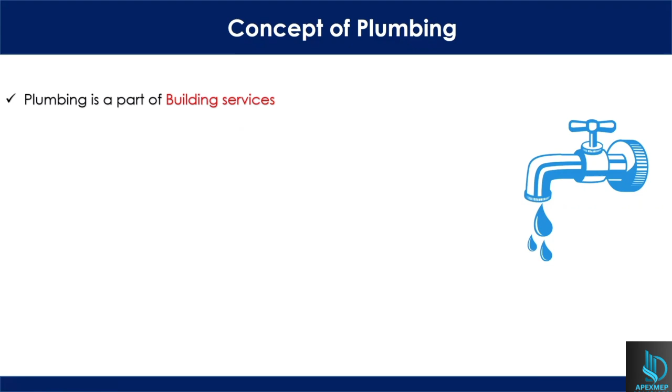If you go by the definition of plumbing systems, it is that service that provides safe, potable water at adequate pressure and quantities. Pressure and quantities are the two most important things while you are supplying the water inside the building at desired locations. So we have bathrooms, we have shower areas. Wherever we have the demand of water, there we have to supply the water at desirable pressure and quantities.

For example, this is a hose bib, right? In this case, there'll be some pressure of water while it is leaving this hose bib. So what is the minimum pressure that you have to maintain while supplying the water to this fixture? And the quantity means how many gallons per minute you have to maintain as the flow rate across this hose bib. So these two things you have to keep in mind. This is very important, and we have to follow as per the standard. There's no calculation involved. We have to directly follow the standards.

And carrying away the waste matter in a hygienic manner. Once you are supplying the water, there'll be some wastage also. That wastage we have to carry outside the building in a hygienic manner. Hygienic manner means you have to carry it out in a way that it should not smell inside the building. It should not splash outside the pipe. All those things you have to keep in mind.

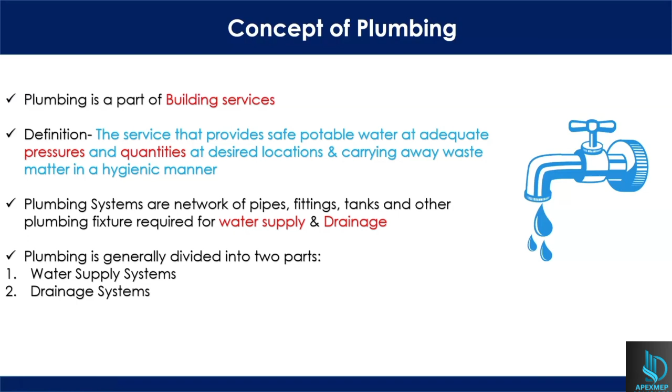Plumbing systems are a network of pipes, fittings, tanks which are used for storing the water, and other plumbing fixtures like water closets, lavatories, urinals. So it's a network of all those things which are required for water supply and drainage. Water supply and drainage are the two important things in the whole plumbing design. It is basically divided into two parts: one is the water supply system and one is your drainage system. In this course, we'll majorly focus on the water supply systems.

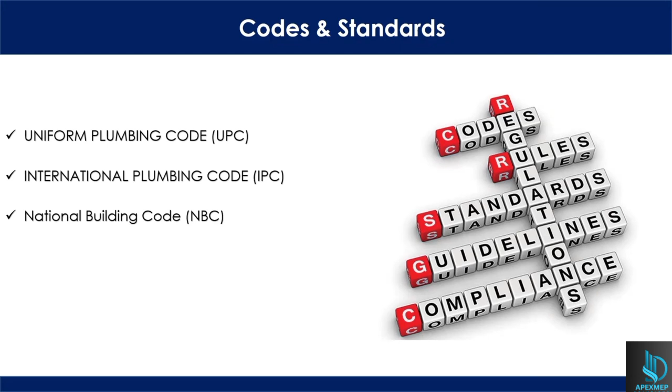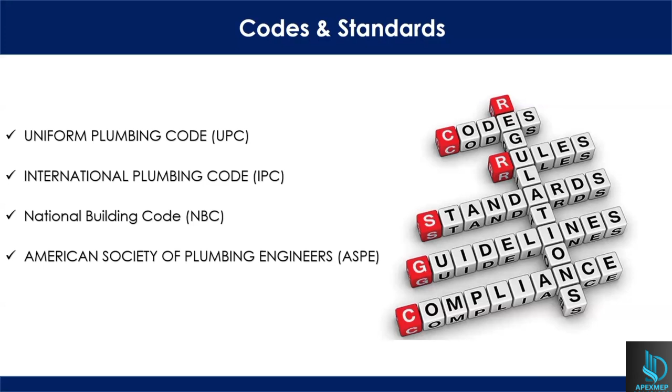Codes and standards. During our plumbing design, we will be using some codes and standards for our design purpose. What are those? The most commonly used codes and standards are: the first one is your Uniform Plumbing Code, UPC, International Plumbing Code, IPC, National Building Code, that is NBC, and American Society of Plumbing Engineers, that is called ASPE. There are many more standards available, but the most commonly used that we'll be using in this course are these four.

Now we will understand the concept of plumbing systems for residential homes and commercial buildings. In our residential homes, we have one domestic overhead tank placed on the roof that supplies water to all the fixtures inside our homes. This domestic water tank is filled either by the submersible pump or from the municipality line. The water discharged from all these fixtures, which is known as black water, is sent outside the building, either to the septic tank or the municipality sewer line. So this is the case we have in our residential homes.

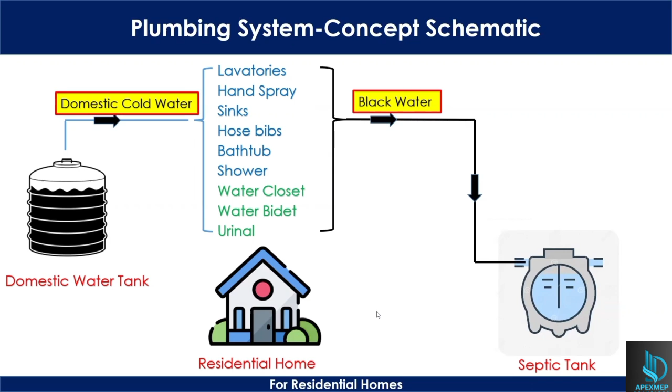Whereas for a commercial building, the scene is different. We have a domestic overhead tank placed on the roof, and that supplies water only to the non-toilet fixtures. These are the toilet fixtures: water closet, bidet, urinal. Other than that are lavatories, hand spray sinks. These are non-toilet fixtures, where the water comes in contact with the human. So the domestic water tank will supply water only to these fixtures, which is called domestic cold water. The discharge from these fixtures will be supplied to the gray water tank.

This is known as the gray water tank, and the water which is discharged from these fixtures is known as the wastewater. What is the purpose of this gray water tank? It will recycle that water, and that water after recycling will be used in these fixtures, because the water in these fixtures will be used for flushing. So that is why this water which we are getting from this gray water tank is known as

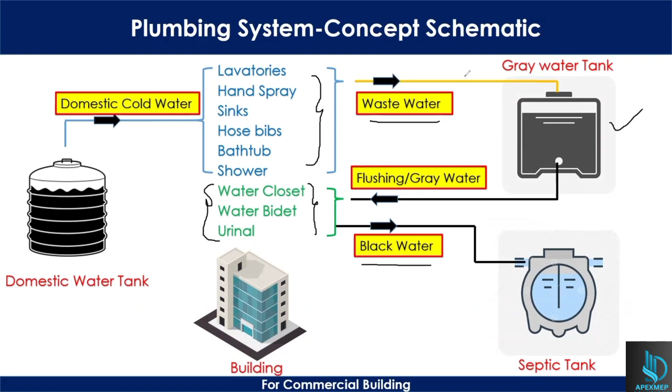flushing or gray water. The water after discharging from these fixtures will be sent back to the septic tank or the municipality sewer line. This water which is discharged from these toilet fixtures is known as the black water. So this is the concept that we have in a commercial building.

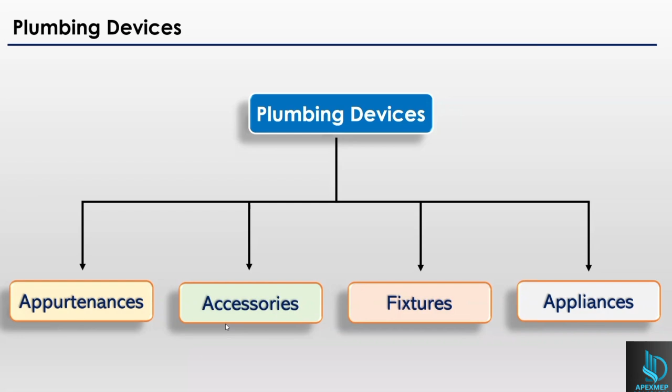Plumbing devices. We have classified the plumbing devices into four main types: appurtenances, accessories, fixtures, and appliances. We'll be looking at the functions of these plumbing devices. Appurtenances are used to make the system more effective, for example, valves. Accessories are used to perform some useful functions like operating, maintaining, inspecting, or servicing, for example, a water meter.

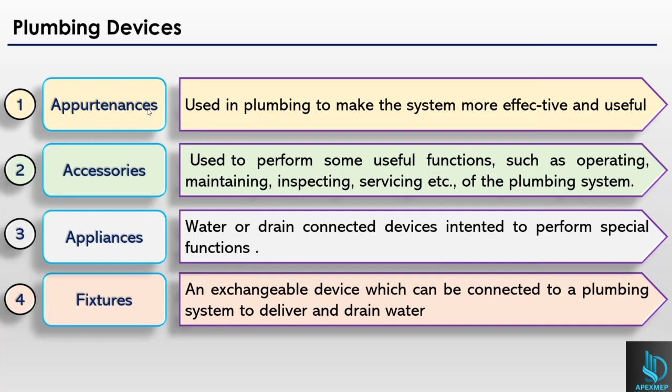Appliances are water or drain connected devices intended to perform some special functions, for example, a washing machine or a drinking fountain. So all that will come under the appliances. Fixtures are exchangeable devices, for example, water closet, lavatories, wash basin. So all that will come under your fixtures. So we have a list of all the items, the things that will be covered in each plumbing device.

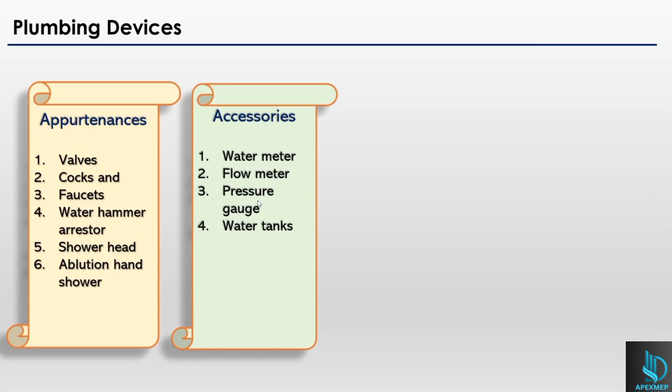In appurtenances, we have valves, cocks and faucets, water hammer arrestor, shower head, and ablution hand shower. In accessories, we have water meter, flow meter, pressure gauge, water tanks. In fixtures, we have lavatories, bathtub, kitchen sink, water closet, urinals, and bidet. In appliances, we have flushing devices, drinking fountains, washing machines, and interceptor. An interceptor can be, for example, a grease interceptor. So all these are the items that we have in these plumbing devices.

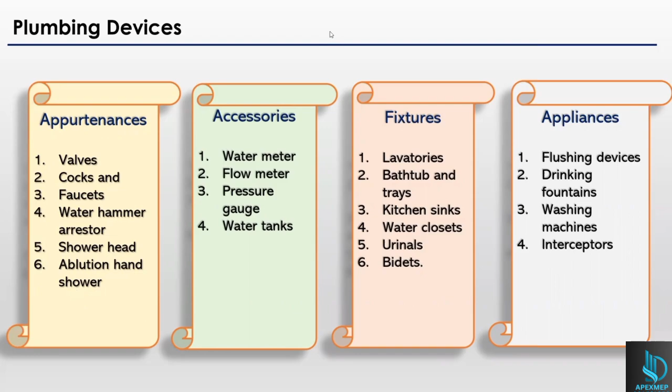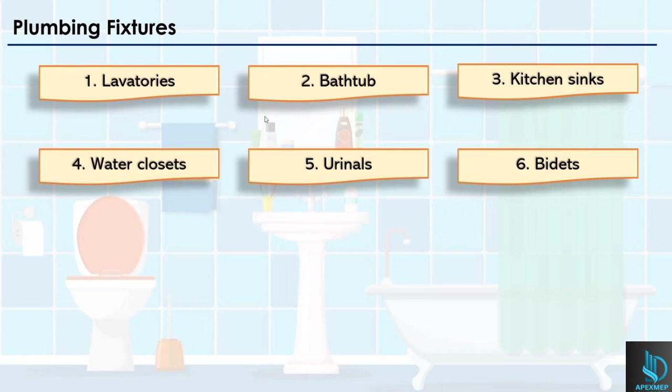Plumbing fixtures. Generally, we have these 6 common types of plumbing fixtures: lavatories, bathtub, kitchen sink, water closet, urinals, and bidet. One by one, we will be looking at each of these plumbing fixtures and their installation details. Lavatories basically have 4 main types: wall hung, pedestal, countertop basin, or corner basin.

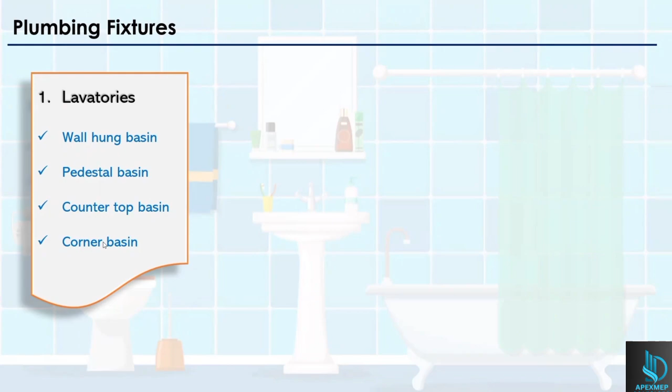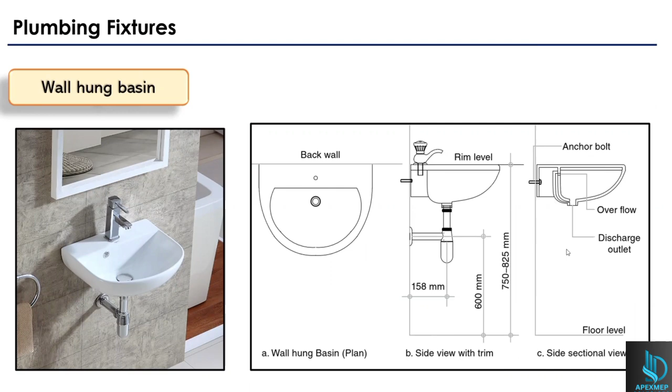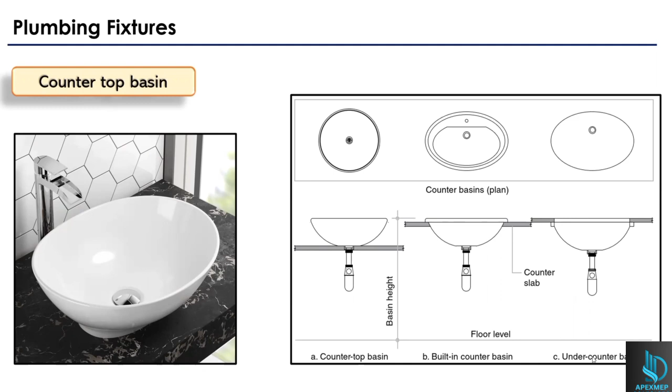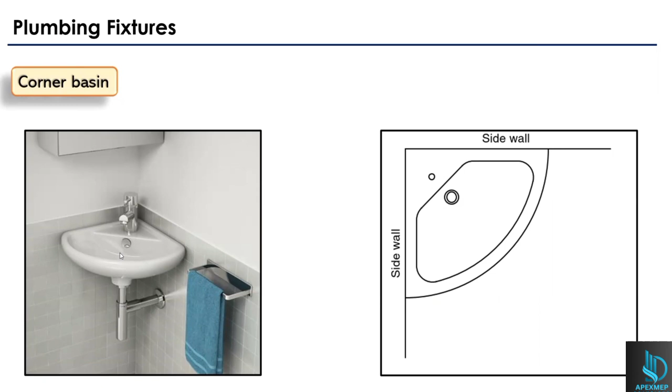And the fourth one, we have the corner basin. The corner basin is basically recommended for bathrooms which have very limited space, because it saves a lot of area. So where we have limited space, we go with corner basins. The second type of plumbing fixture we have is the bathtub.

In a bathtub, there are multiple provisions given, for example, for the water inlet, overflow pipe, and drain pipe for cleaning of the bathtub, and bathtubs have a slope with respect to the finished floor towards the drain pipe. It will have a cold water point, hot water point, and mixed water point.

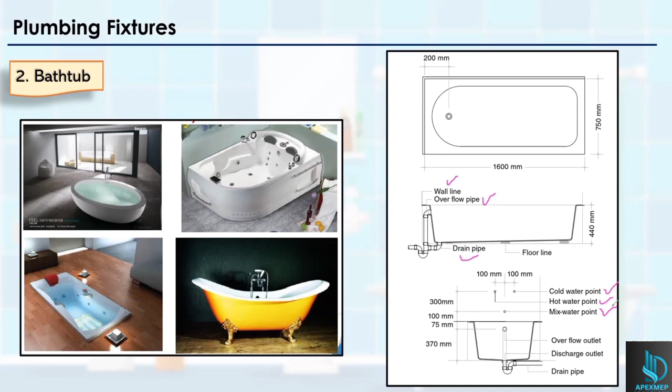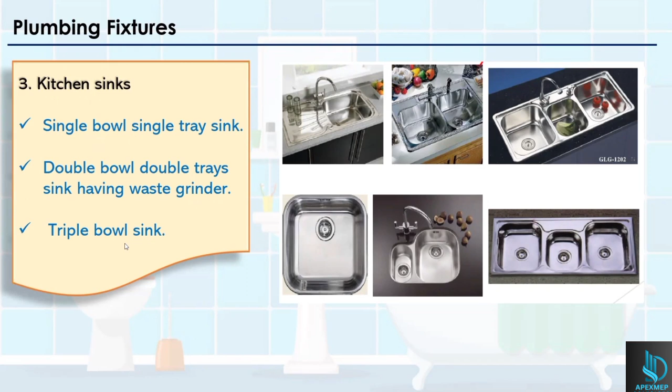Kitchen sinks. Kitchen sinks come in different varieties: single bowl single tray, double bowl double trays, having a waste grinder, and triple bowl sink. In a single bowl sink, you see we have a single bowl and a single tray. If you see the installation details, this is your plan view. This is your section.

In this case, you can see the length varies from 750 to 900 mm and width varies from 450 to 500 mm. And the height we generally maintain for the sink is 900 mm, that is 0.9 meters.

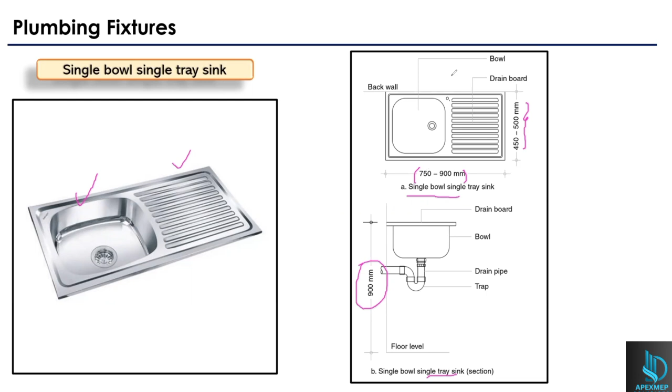Double bowl, double tray sink having waste grinder. In this case, you see we have two bowls and two trays. This is your plan view. This is your elevation. And in this case, we have an attached waste grinder. This is a food waste grinder in case any solid food particle is there, so this will grind that to avoid any kind of clogging.

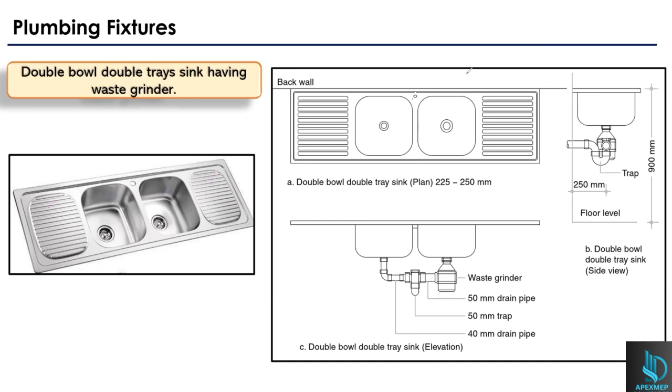This is a triple bowl sink. In this we have triple bowls. As you can see, the length generally is 1050 mm and the width is 500 mm. And in this case, we have triple bowls and the drain of these triple bowls is connected to a single pipe of 40 mm trap.

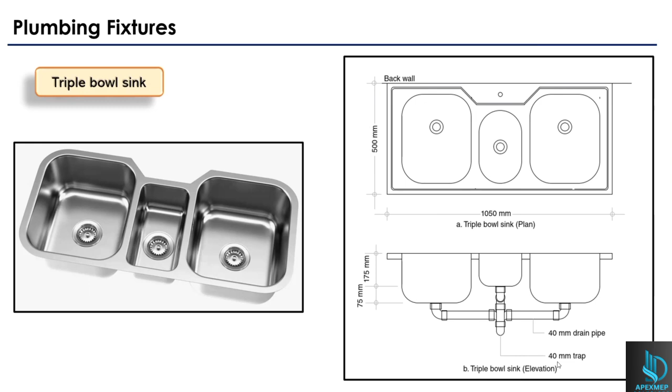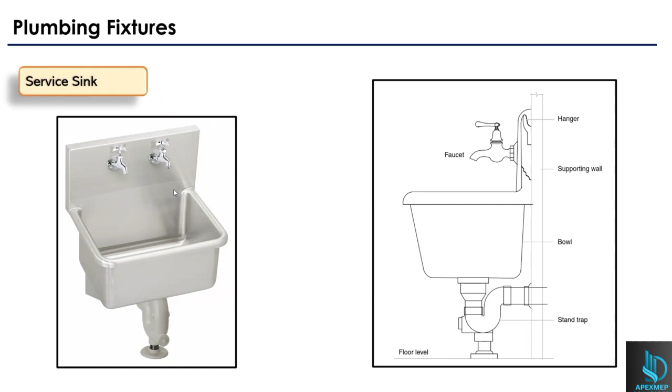There is another type which is called the service sink. The service sink is generally not for the washing of utensils. It is not for that purpose. It is, for example, if you want to wash the mop, or any dirty water. So in that case, you can use this service sink. The service sink is generally floor mounted, having a hose bib. So this is for that purpose. This will not be used for the washing of utensils.

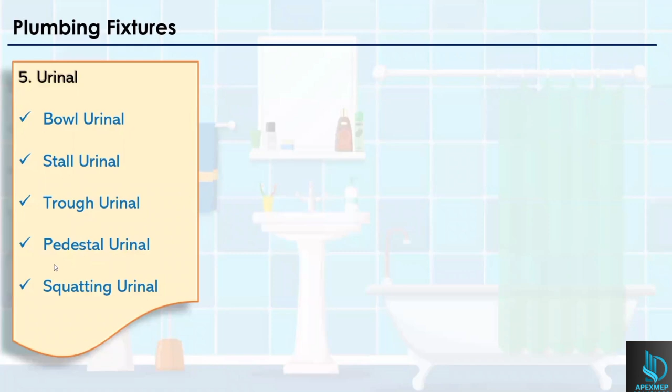The fifth type of plumbing fixture is your urinal. Urinals have five main types: bowl, stall, trough, pedestal, and squatting. The bowl you might have seen in commercial buildings like malls. These are generally wall mounted. The mounting height should not exceed 625; it should be 600 to 625. And this is called your lip portion, and this is your bowl to which the trap is connected.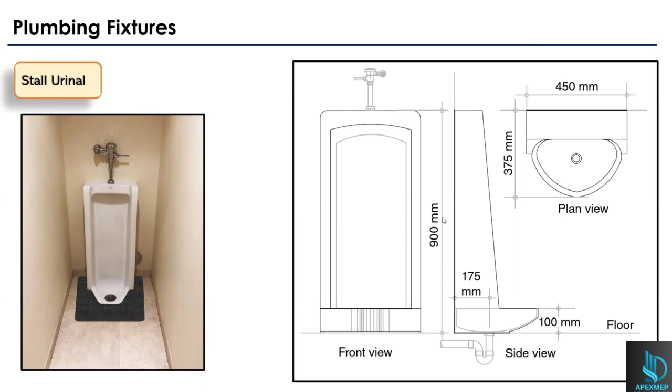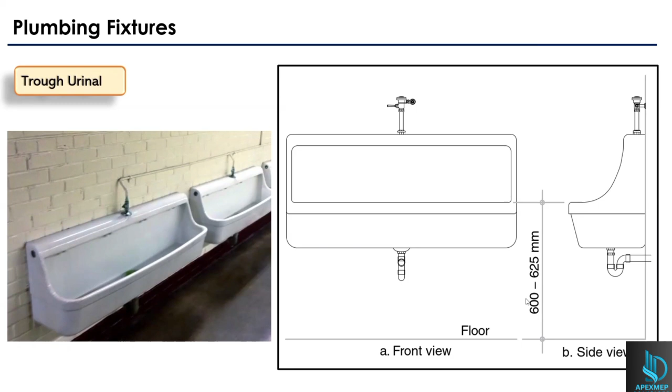Trough urinal. The trough urinal is not most common in India, but it is in other countries. This is a type of urinal in which multiple people can urinate at a single time. So this is not for one; multiple people can use this at a single time. Generally the mounting height is 600 to 625 mm. As you can see, this is your front view and this is your side view.

Pedestal urinal. The pedestal urinal is again a special type. It is more costly compared to the other ones. And this is floor mounted.

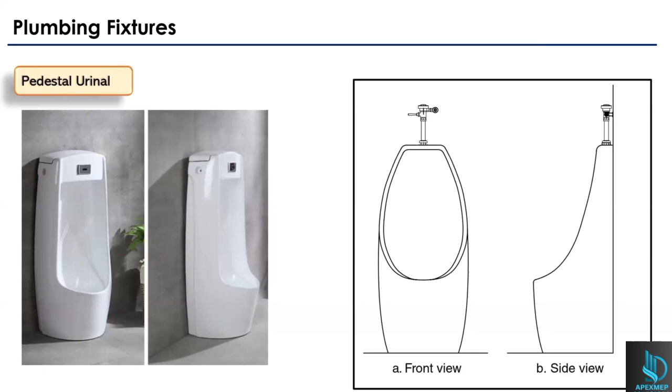Squatting type. Generally this type of urinal you will see in the Middle East. Squatting type urinals are used where Muslims are not allowed to pee in a standing position. So mostly in the Middle East, like Saudi Arabia and UAE, you will see these kinds of squatting urinals. In this case, you don't have to stand; you have to sit there and then pee. So this is your plan view, and this is your side view. This is the same as the squatting water closet, except you can only pee in this type of urinal; you cannot use it as a toilet.